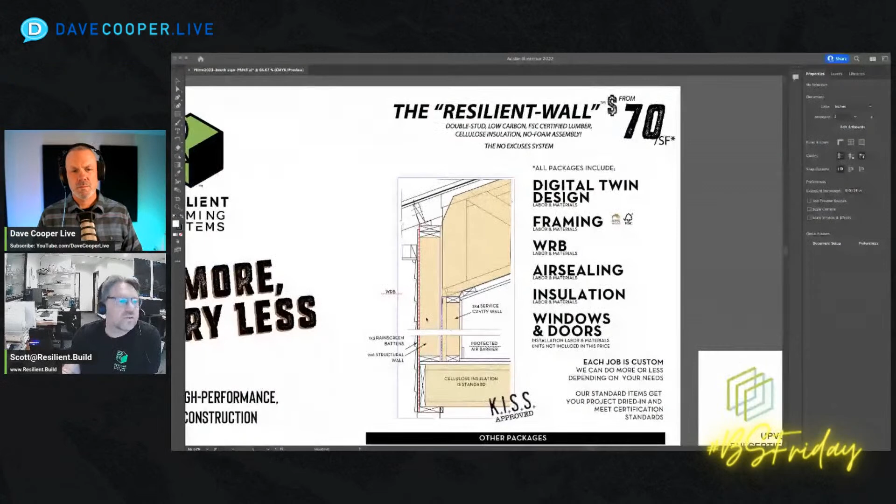Super cool. What didn't I talk about that everybody needs to know, Scott? Golly. Well, let me show you some details that we've got going on. We can do any design anyone brings us. We're not trying to create our own set of architectural beauty and say that's just what you have to build. So you can bring us whatever your designs are and we can figure it out for you. There are high performance rules as far as simplicity of form and things like that will just make it easier for everyone and cheaper. But we walk designers through that kind of stuff all the time. We've been doing that for years.

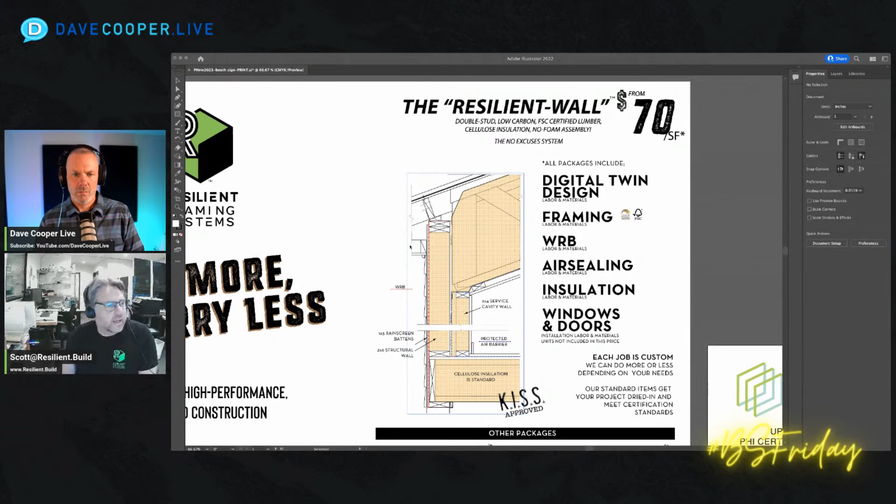But we see it as almost like a product. So we've got three main products. The first main product, the one we think is the most affordable, the lowest embodied energy, and just the easiest to build and for trades to figure out what's going on when they're on site, is the resilient wall. That's what we call it. It's just a simple double stud wall, 2x6 structural wall, just like every other code built home in America.

The only difference is we put the plywood on the inside. That's our shear value. We use the Mento on the outside. The reason is that plywood is by its nature just less vapor open than these other membranes are going to be. So there's our vapor barrier, our air barrier. We tape it all together and use that. Plus, it's super protected because we put a 2x4 service cavity on the inside, and then this little space between them, anywhere from 1 inch to 6 inches.

And that's where we get the custom ability for jumping through different climate zones with the exact same system. We just open up that gap as you go up the mountains into more challenging climate zones. We can add more insulation super easily and at the lowest cost. Blowing in insulation bibs is just the cheapest insulation you can do, and it's the best. It fills all the crevices and goes around wires and all of that. So it's just the best.

So that's our main. What's that now? Is that done at the factory? We don't. We looked at doing insulation in the factory. We keep going back and forth on it, but the reality is that it more than doubles the weight of the walls, and then we get into some transportation issues. So by not putting it in the factory and doing it all on site, which we have to do some of it on site anyways after the trades.

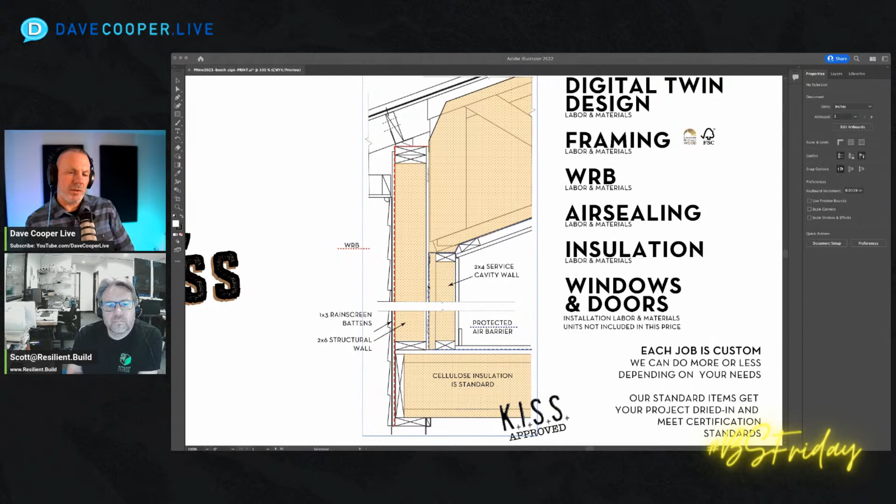There's no reason for us to do it in the shop, which is right behind this wall. That's why I mean on site. So there's no reason to do it in the shop. We can just do it on site, which is where it traditionally gets done anyways. Right. And there's not much of a benefit for doing it here in the shop. So you have multiple, like this is one of the systems. Is there another system that you're using?

Yeah. So this is the resilient system. Then we have what we conveniently call the zipper. Hopefully we won't get in trouble from Huber on that, but it's using the Huber material. So we can use the 1.5 inch polyiso with the Huber material on the outside. People like that. It's very simple. It gives you your plywood on the outside. We still will do battens and bug screens and all of that on the outside. But that's the zipper.

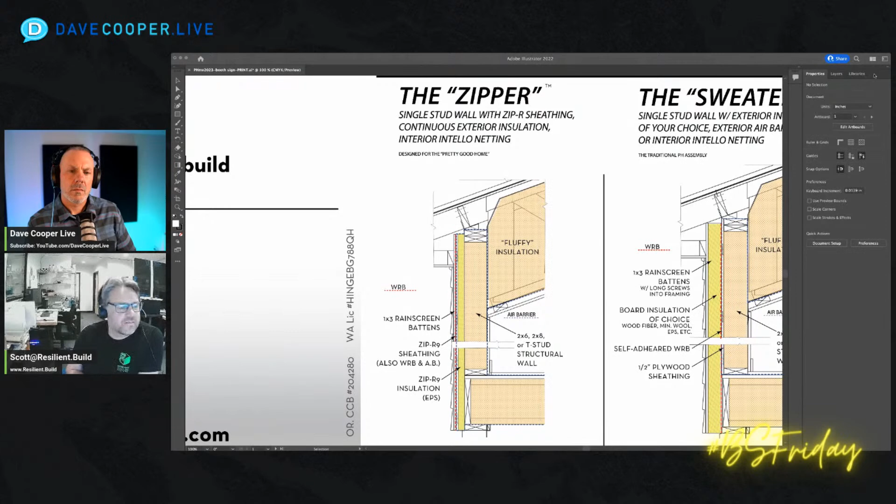And then the sweater is the super traditional passive house type wall system. We've done this several times on site. You do a 2x6 structural or a T-stud structural wall, and then you do insulation of choice on the outside. There's GPS or EPS, or Rockwool is the one most people think about for the fireproofing and things like that. We have a couple clients we're doing this for. It's just a little bit more expensive.

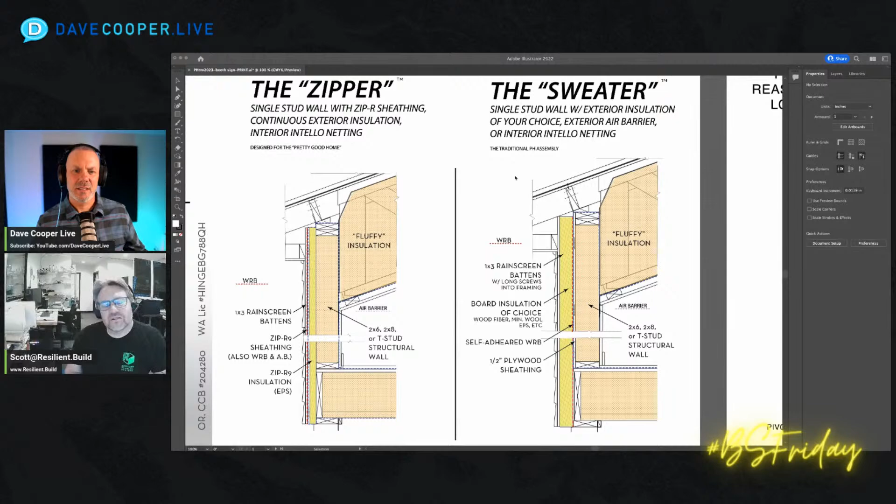It's challenging to get the battens to plane out properly when you have a softer material that you're trying to screw against. Everyone who's built a passive house this way will tell you, add in a couple extra days for just doing 1/8 inch turns with your screwdriver on those battens to move them in and out that tiny little bit, and string lines and all kinds of fancy stuff. But we offer that, and it's a lot easier in our shop, honestly, than it is on site.

Sure. Well, listen, better late than never. What's up, Mr. Willie? Oh, there he is. I am enjoying this, Dave. Scott, so brilliant. I can't tell you how fun it is just to sit and watch. So laid out. The zipper, the sweater, and right before it, the KISS acronym. Keep it simple, silly. That's what I was taught. Brilliant. Thanks, man. That's awesome to hear from you.

I mean, the T-studs are something we've been playing with for a long time. We haven't used them yet, but that's awesome. With what you have there, you're handling all the thermal so well. Dave and I always talk about how there's thousands of options out there. And once you handle it, like with that sweater detail and the zipper, you've created the red line, right? The thermal control. And I love the point Dave brought up about the insulation and how you answered it.

The framing and the structure is done, right? It's so well laid out, and let the insulation happen there. You brought up the logistics point and the weight issue. And now their standard insulator can do that. And who knows, that might change over time. There's a swap depending on location.